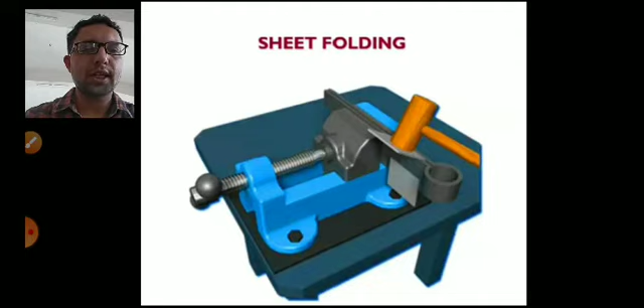First we will cover sheet folding. As shown on screen, there is a sheet folding operation picture. There is a simple stripper on which we apply the sheet, and with the help of a hammer we fold the sheet. That's the simple sheet folding operation.

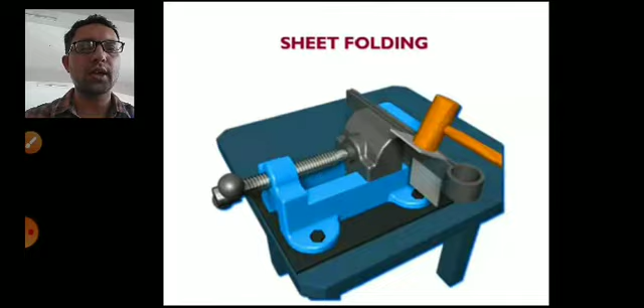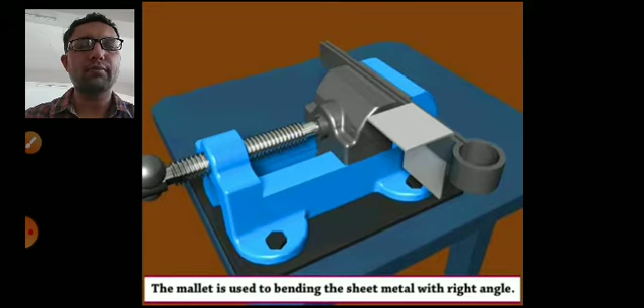Here there is a sheet metal caught between two strips with a vise. We catch the strip and apply force, holding the sheet metal with the folding bars and tightening the vise to prevent the sheet from dropping. Then we apply force with the help of a hammer. The mallet is used to bend the sheet metal at a right angle, giving us the bending operation. Now, the next operation is drawing.

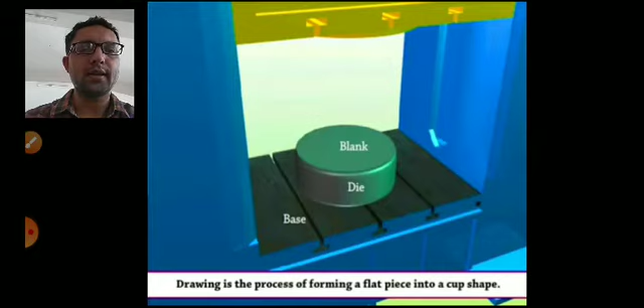These are the equipment used for the drawing operation. There is a base, one die, and one blank, and we apply force from the upper side. Drawing is the process of forming a flat piece into a cup shape. There is a simple flat piece which we convert into a cup shape.

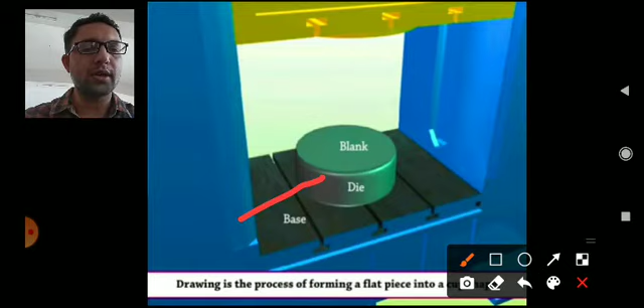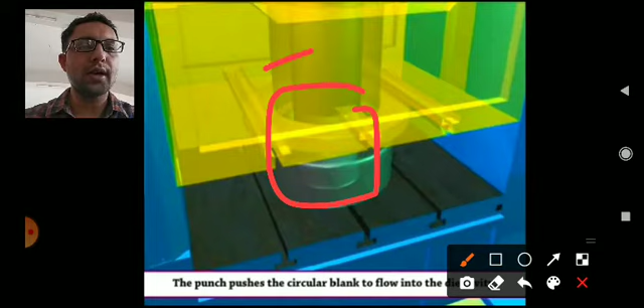We apply force with the help of a punch on the blank. The blank holder applies pressure on the blank to hold it tightly, and then the punch pushes the circular blank. Wherever we apply force with the punch, a cup type of shape is produced on the blank. The punch pushes the circular blank to flow into the die cavity, and finally we get such a cup shape. So the flat piece blank is drawn into a shallow cup shape.

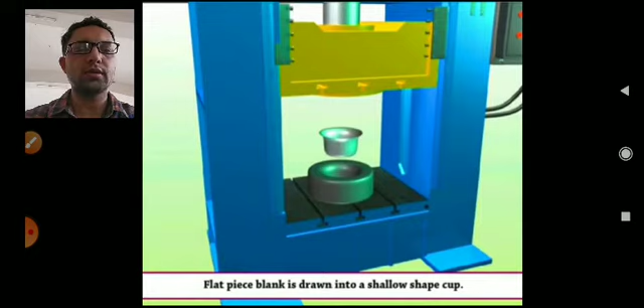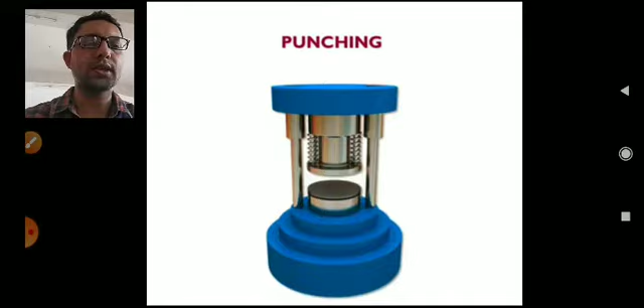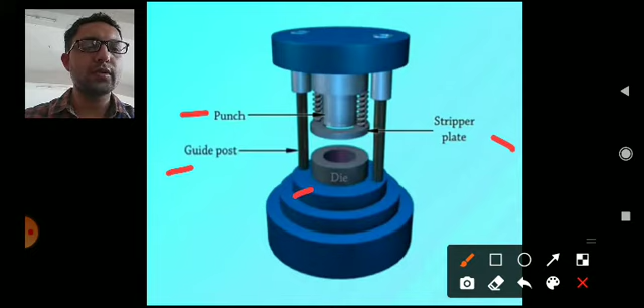These are the normal operations of drawing. Next is punching. There is a little difference between punching and piercing. These are the simple machines used for the punching operation. We use different components like punch, guide post, and stripper plate for punching, and there is also a die located here.

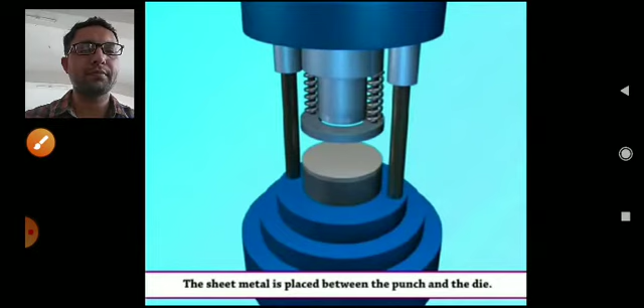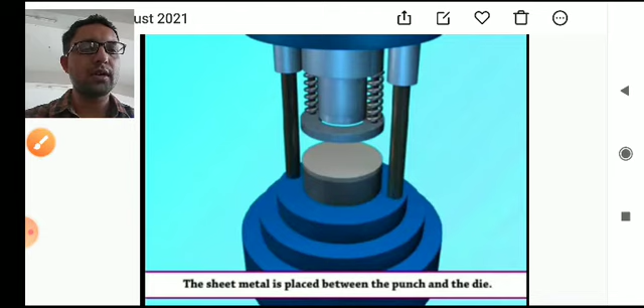We place the sheet metal between the punch and the die and apply force with the help of the punch on the sheet metal. The sheet metal is placed between the punch and the die, as you see here. We put the sheet down and apply the force, so the punch moves down and shears the sheet metal.

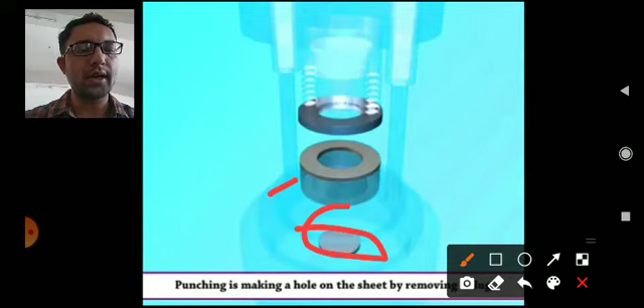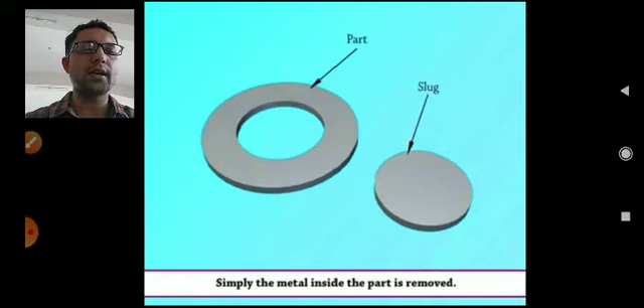Whenever we apply force, we get this type of product. Punching is making a hole on the sheet by removing a slug. Whatever the product we finally get, this is our final part. So simply the metal inside the part is removed, and in the punching operation the final product is this part. Now, as compared to punching, in the blanking operation the process should be same, but the final product is the slug instead of the part.

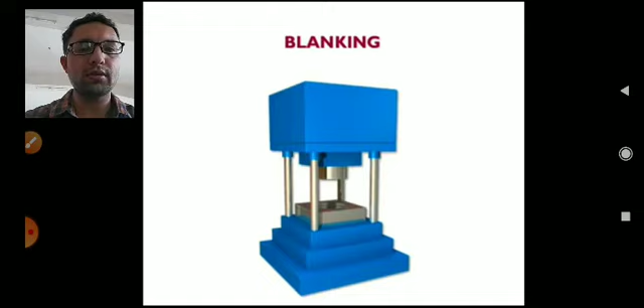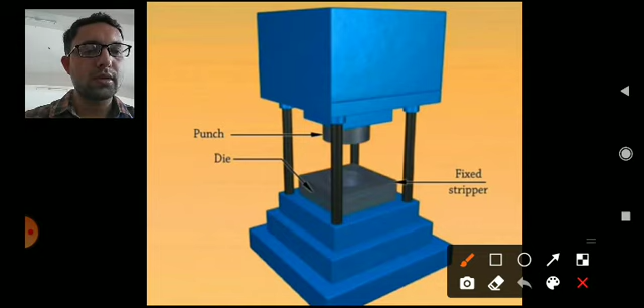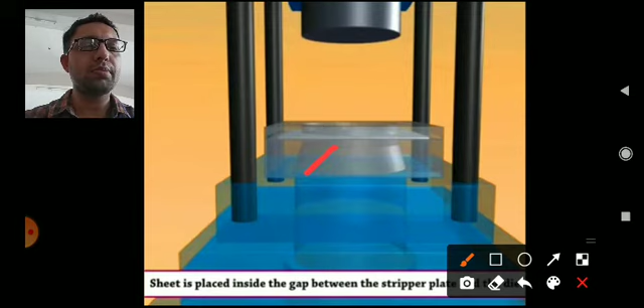These are similar machines used for the blanking operation as compared to punching. In that there is also a punch, die, and fixed stripper, and we put the sheet between them, held between two strips as seen in the next slide. The sheet is placed inside the gap between the stripper plate, which is the upper portion, and the die, the lower portion. Then we apply force with the help of the punch.

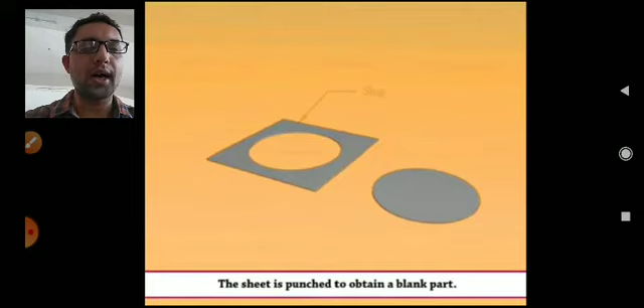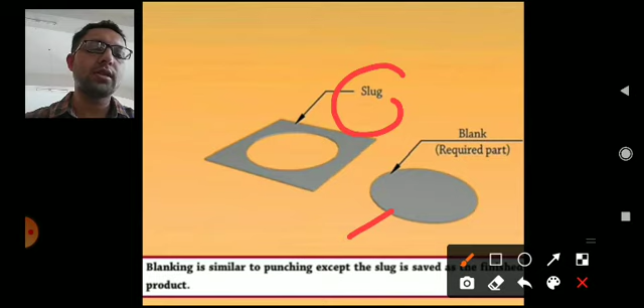Whatever we get, that is the slug. The sheet is punched to obtain a blank part, and that blank part is our required part. This is simply called the blanking operation. Blanking is similar to punching, except that the slug is saved as the finished product. In the punching operation, whatever the slug is, in the blanking operation this slug becomes the required part.

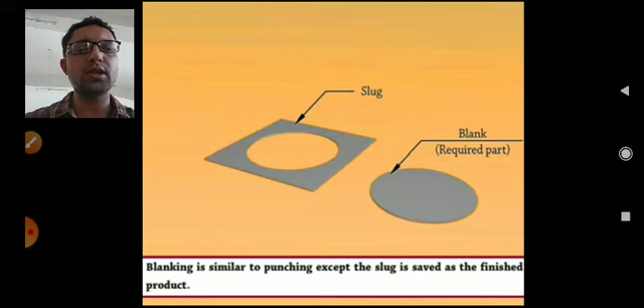There is a little difference between punching and blanking. Both operations are similar, but keep this difference in mind: in blanking, the metal around the part is removed, and we get the required part as the blank. So we have covered the blanking operation, punching operation, and sheet folding.

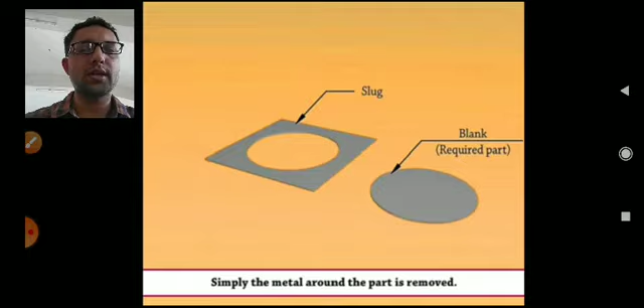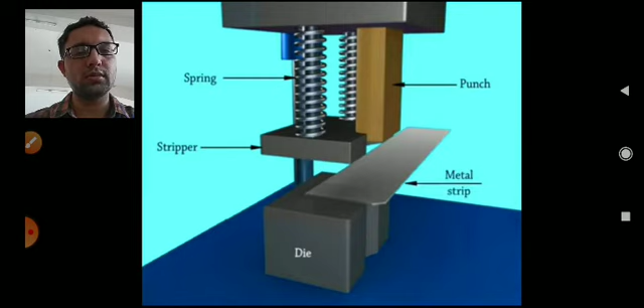Next operation is notching. These are the machines used for the notching operation. For notching you require a punch, die, metal strip, stripper, and spring. This is the simple component used for this operation. Notching means cutting down the part, but we cut it down on the edge, as seen here.

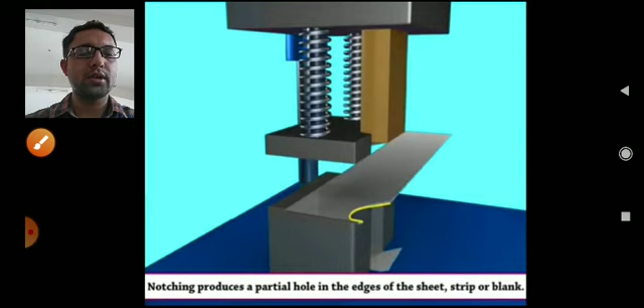So these are some sheet metal working operations that we have seen today. In the next video we will continue with some more sheet metal operations.